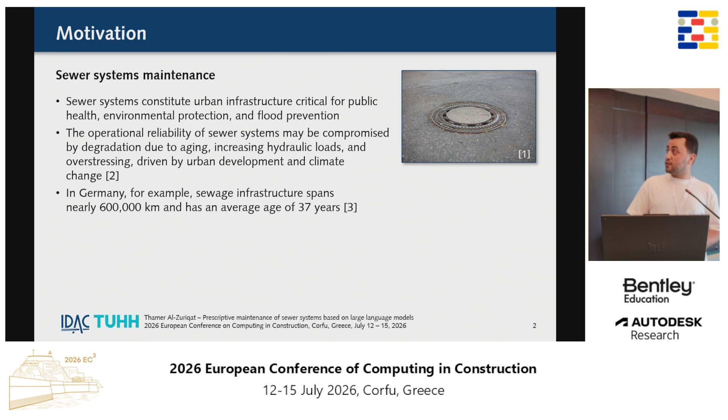If we take Germany, for example, we have a total of 600,000 kilometers of sewer systems with an average age of 37 years. This gets even worse—for example, where I came from in Hamburg, 15% of our sewer system is over 100 years old.

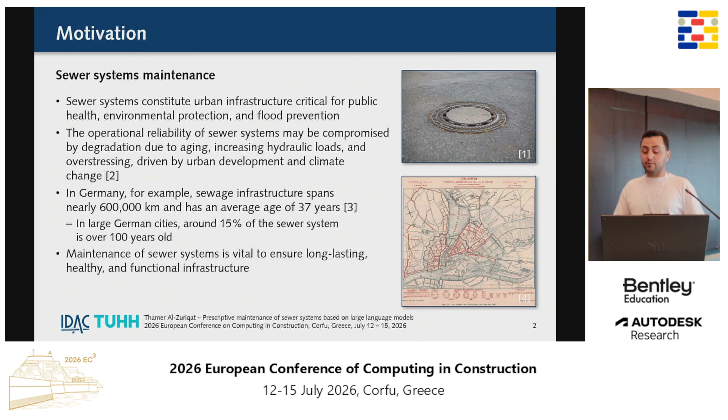This brings to the table the importance of maintaining those sewer systems to ensure a healthy, long-lasting infrastructure. However, when it comes to decision making for sewer systems, we usually have to deal with multidimensional data coming from different sources—SHM, reports, images—and interpreting all of this data and translating it into a stepwise repair procedure is a challenging task.

This is why we thought about introducing a framework we called prescriptive maintenance, in which we used a large language model and adapted it to the domain of sewer system maintenance. As we all know, LLMs are pretty good at self-learning complex relationships and dealing with heterogeneous data.

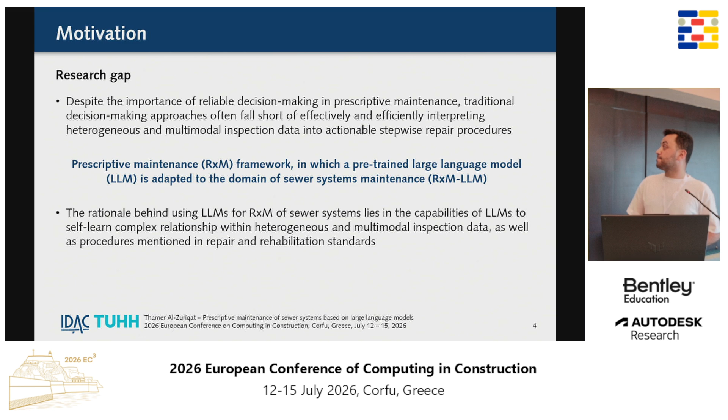They also have the advantage of learning from repair and rehabilitation standards that already exist.

So when it comes to our approach, similar to any machine learning approach, you have a phase of data preparation and pre-processing, and you also have a phase of fine-tuning or training your large language model.

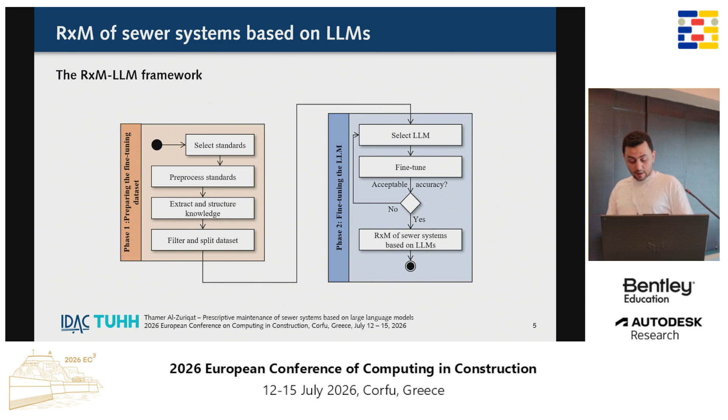To explain each step, first we looked into already existing repair and rehabilitation standards. In Germany, we have standards coming from the German Institute for Standardization, as well as the German Association for Water, Wastewater, and Waste.

At the end, when we filtered these standards and standard parts or series, we found 33 standard parts that mentioned or spoke about sewer system maintenance.

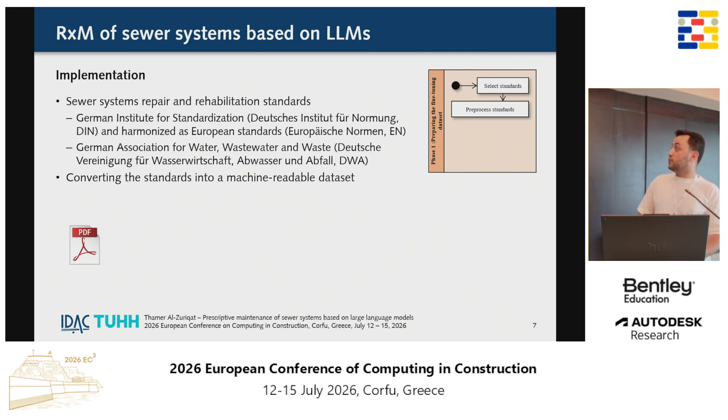For the second step, it was about pre-processing these standards. Usually those standards come in the form of a PDF, so you need to translate them into a language that can be understood by machines. We used a Python pipeline with optical character recognition to translate them into text.

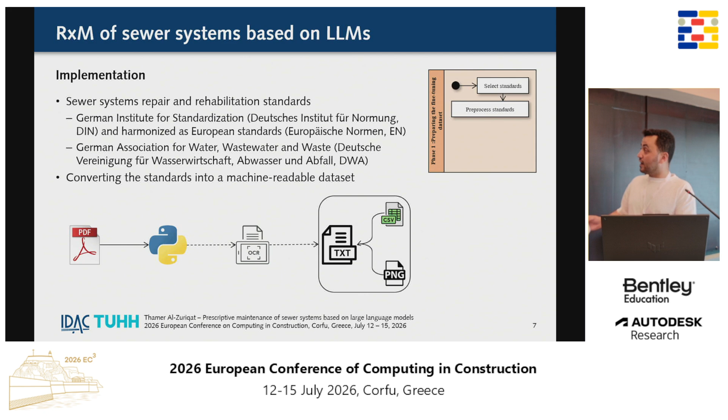In the standards, there are also tables, which contain critical information, as well as figures. So the tables got translated into CSV files and the images into PNG files, and got referenced within the text.

Now, the next step is how can we extract the knowledge from this? We thought the best way would be to translate them into a Q&A database.

The way we did it, we took those text files, the CSV files, PNG files, again using Python. We spoke a bit with our friend ChatGPT and asked it to create this Q&A database for us.

Now, it sounds a bit arbitrary, so we thought maybe we could find a way to constrain the process a little. So again we took all these standard parts, threw them into Python, again using ChatGPT, and asked ChatGPT to create a summary for these standard parts.

We then used the summary to constrain the other conversation with the second ChatGPT. At the end, we have a total of 9,500 Q&A pairs.

This is the distribution from the different standard series. We have the highest number coming from DWA M143, which was the biggest part that spoke about sewer system maintenance.

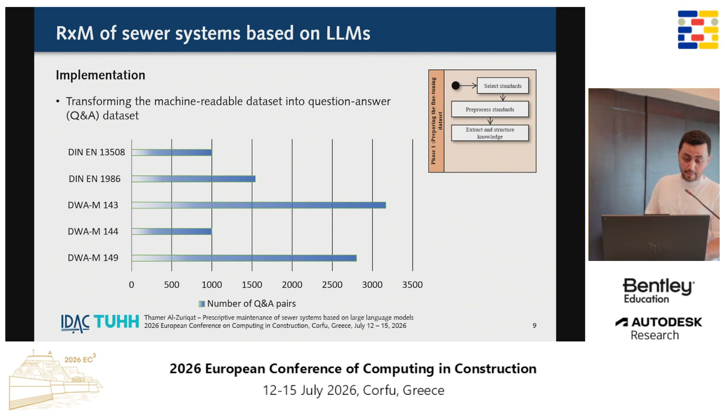Now, when it comes to the data, we noticed in the generated data some duplicates, so we used cosine similarity filtering to remove these duplicates, and we ended up with almost 9,000 Q&A pairs.

Again, you have the classical machine learning approach by splitting your data into training, validation, and testing. From those testing sets, we held out 200 Q&As, and I will speak about them again in the validation test.

For the next step, it was about selecting a large language model. The criteria for us was that we wanted a model with a parameter scale that's relatively okay with the hardware we have, and we also wanted a large language model that's open and can be reproduced. We ended up with two candidates, DeepSeek and Mistral 7b Instruct, and we selected Mistral 7b Instruct, only because of the hardware limitation.

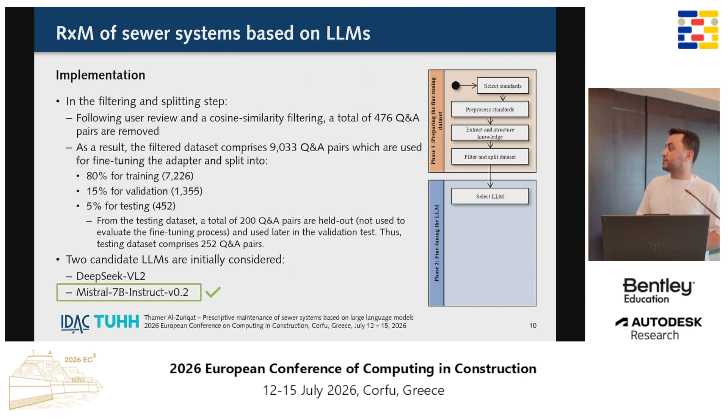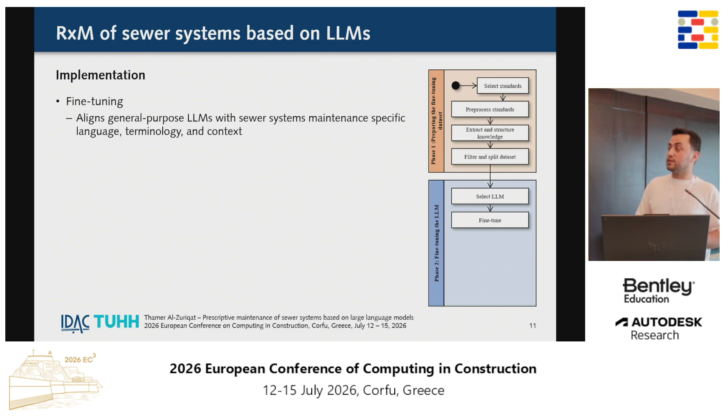Now, when it comes to fine-tuning the model, and here I'm using the word fine-tuning, not training, as we all know training a large language model is a challenging task and needs a lot of resources. So what we're trying to do is fine-tune the model, meaning try to align the model with the language, terminology, and context of what you want to use it for.

What we have used for fine-tuning is something called low-rank adaptation. This has the advantage of being fast and can be done using standard hardware, it also retains the general knowledge of the LLM, and is scalable, so you can translate the knowledge from another application into your domain with minimal overhead.

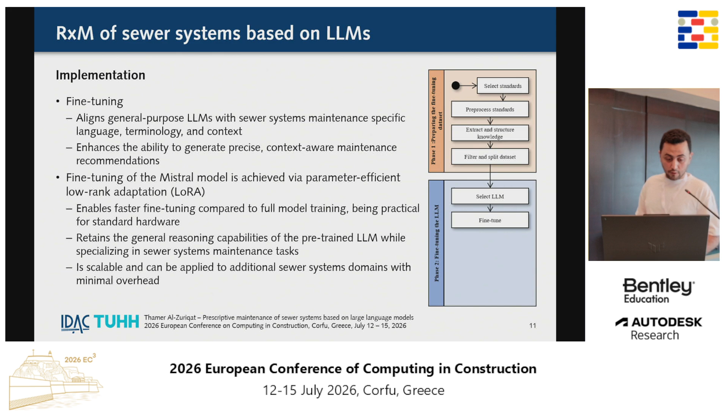In the fine-tuning process, we use the training dataset and validation dataset to fine-tune the model, and at the end we check the accuracy of the model using the testing dataset until we were satisfied with the accuracy. We got a mean token accuracy of 91%, so we took this model and considered it done.

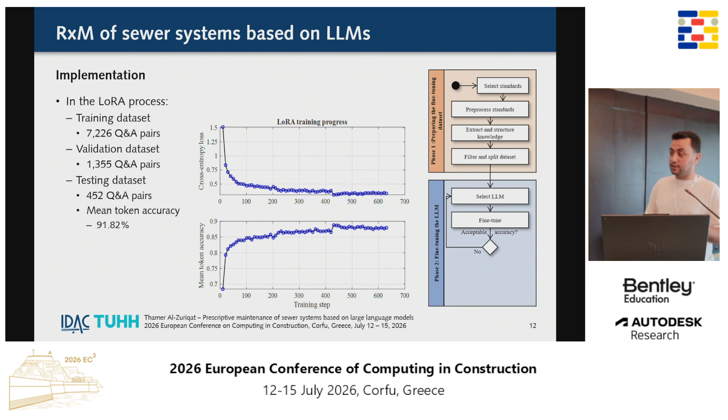Now for the validation test, if you remember, I spoke about a held-out testing dataset of 200 Q&As. We selected those to cover different damage scenarios, different damage locations, as well as different repair severity levels.

We threw the questions to both models, the baseline Mistral model without fine-tuning, as well as the adapted one after fine-tuning. We designed a scoring rubric that considered, for example, structural clarity of the response and conformity with the standards. We also introduced a hallucination penalty. Then we saw how each model performed.

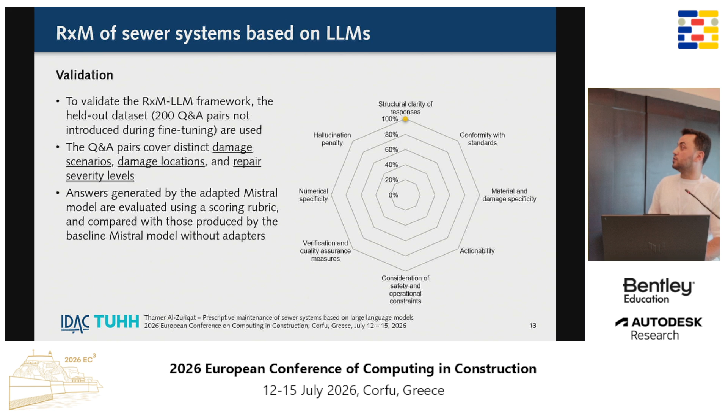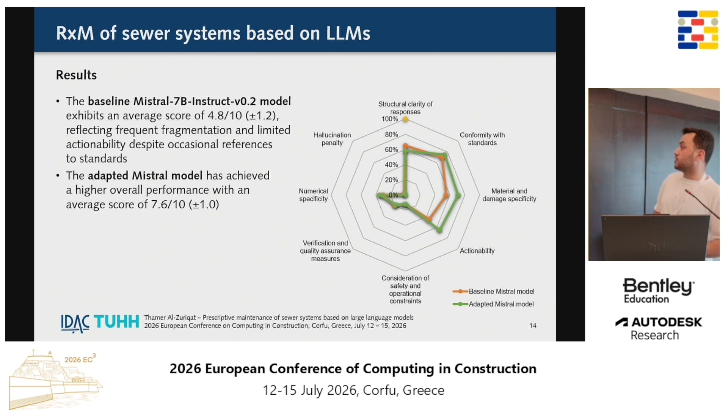So this is the performance of both models. The Mistral 7b baseline model scored 4.8 on our scoring rubric, and the adapted one had a higher score, 7.6 out of 10.

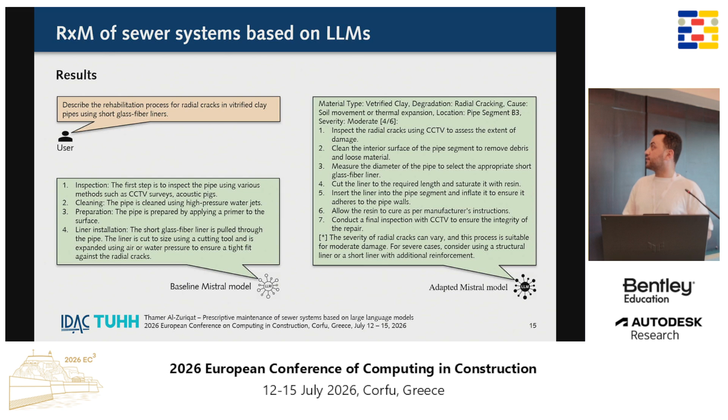This is one of the questions we asked both models, along with the answer generated by the baseline model and the answer generated by the adapted model. We noticed that the baseline model's answers were still fragmented, even though it occasionally mentioned a standard or source, but this was not the case for the adapted model, which was more structured, clearer, and more domain specific.

To summarize, we all know the importance of sewer systems and maintaining them to ensure a long-lasting, healthy, and functional infrastructure. Traditional decision-making often falls short when dealing with heterogeneous and multidimensional inspection data and translating that data into actionable maintenance strategies.

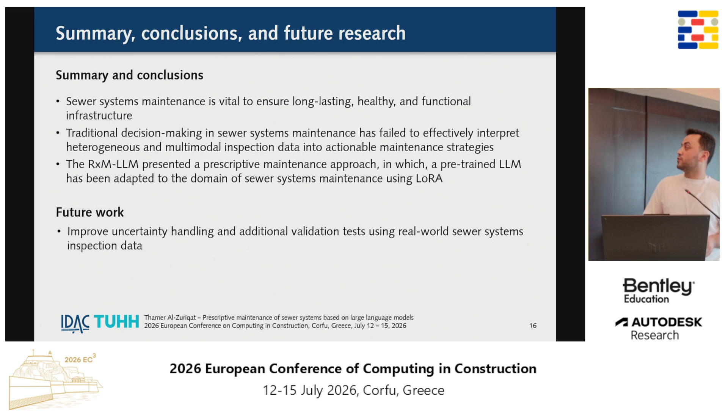This is why we were working on the framework called RxM, prescriptive maintenance using large language models, in which we used this pre-trained LLM and adapted it to the domain of sewer systems. For future work, we would like to improve the uncertainty handling of our models, as well as validate it further using real-world sewer system inspection data. Thank you very much.